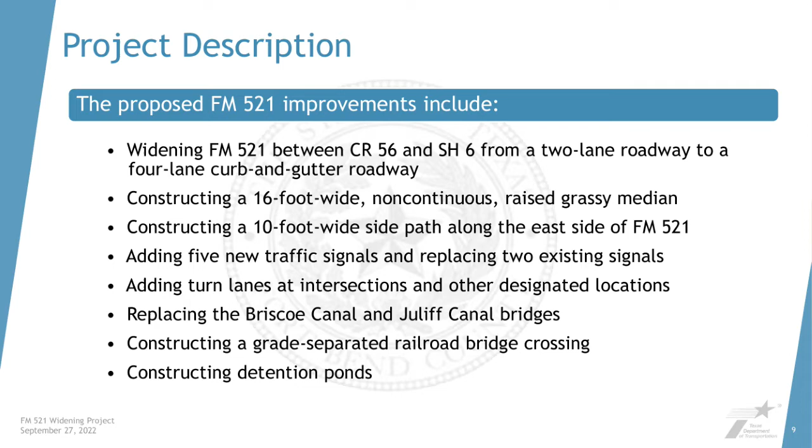The project includes replacing the Briscoe Canal and Juliff Canal bridges and constructing a grade-separated bridge at the BNSF Railroad crossing. The project would also include the construction of new detention ponds. The project is needed because of limited mobility in the corridor, anticipated future population growth and increase in traffic, and the current two-lane undivided roadway does not meet design or safety standards.

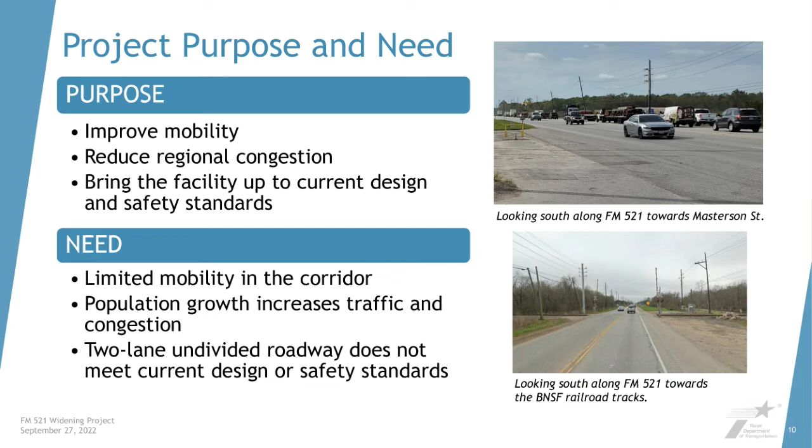The purpose of the FM 521 widening project is to improve mobility, reduce regional congestion, and bring the facility up to current design standards. Let's talk about daily traffic volumes along FM 521, what it is today, and what is projected for the future.

Average daily traffic, or ADT, represents the traffic volume that results from dividing a traffic count obtained during a given time period by the number of days in that time period, or the average traffic volume per day. Based on preliminary traffic data, the 2024 ADT along FM 521 within the project limits is 27,200 vehicles per day, or VPD.

By the year 2044, traffic volumes on FM 521 are projected to be 48,900 vehicles per day, which is an 80% increase from 2024.

With no improvements, the current capacity of FM 521 would not be adequate to accommodate projected traffic volumes in 2044, and traffic congestion would increase.

Fort Bend County initiated a feasibility study for FM 521 in March of 2019 due to the increased number of planned developments along the corridor.

The study included data collection and stakeholder coordination to help determine what improvements were needed within the project limits. The feasibility study concluded that the corridor is rapidly developing and the need for additional capacity is becoming critical.

The project team has evaluated environmental constraints and analyzed potential environmental impacts. Constraints such as water bodies, potential wetlands, floodplains, gas stations, and railroads are shown on the environmental constraints map included with the public meeting materials.

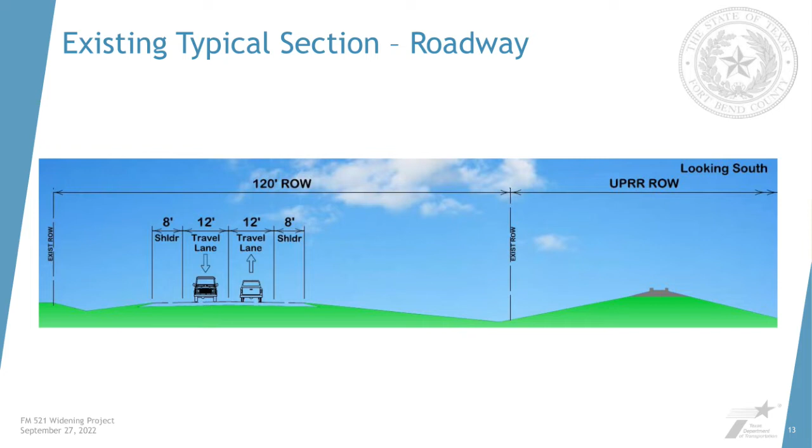The remainder of the existing FM 521 roadway includes one 12-foot wide travel lane in each direction and 8-foot wide outside shoulders. The typical existing right-of-way width is approximately 120 feet.

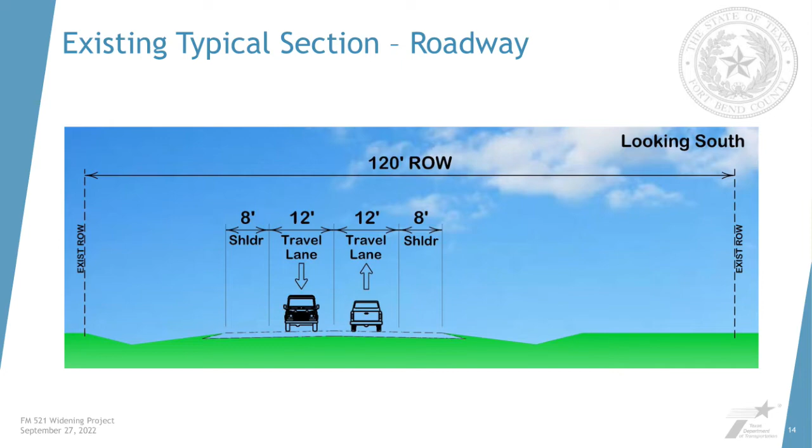The proposed project would include two new canal bridges. These typical sections would have two 12-foot wide travel lanes in each direction, a 16-foot wide continuous raised concrete median, and a 14-foot wide side path separated from traffic by a concrete traffic rail.

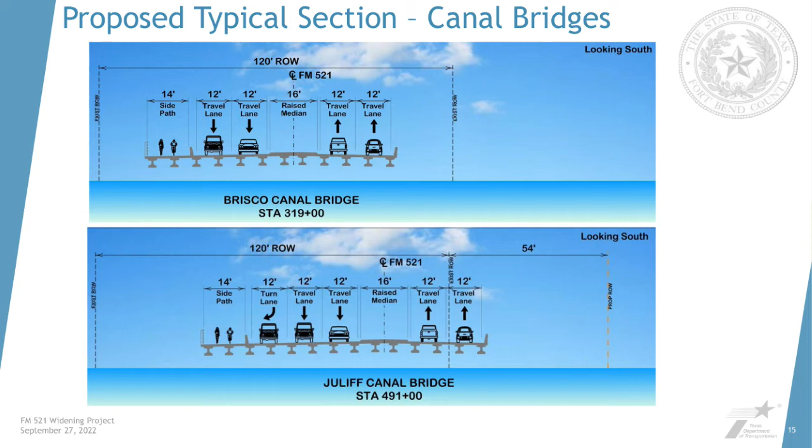The Briscoe Canal Bridge would not require additional right-of-way. The Juliff Canal Bridge would require an additional 54 feet of right-of-way, as shown in the proposed typical section. The proposed railroad bridge typical section will be discussed a few slides later.

Left and right turn lanes would be provided at designated locations. Please refer to the schematic, which is included in the public meeting materials, for specific locations.

For the remainder of the project length, the typical section generally includes two 12-foot wide travel lanes in each direction, a 16-foot wide non-continuous raised grassy median, and a 10-foot wide side path to accommodate pedestrians and bicyclists. Left and right turn lanes would be provided at designated locations.

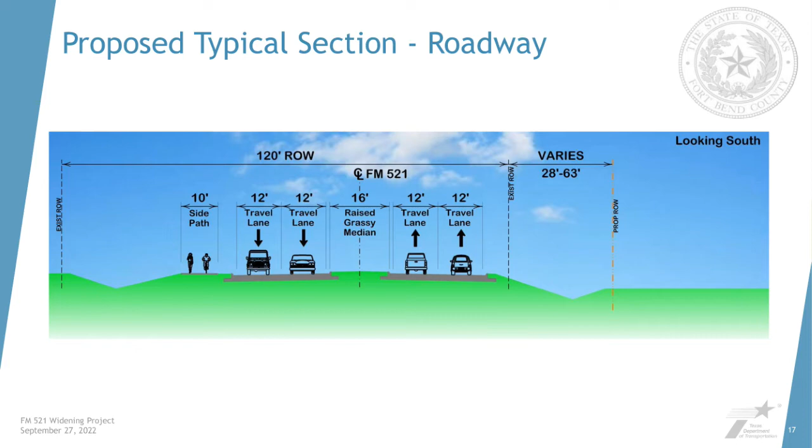The proposed roadway right-of-way width would range between 148 feet and 183 feet. This would require an additional 28 to 63 feet of proposed new right-of-way on the west side of FM 521.

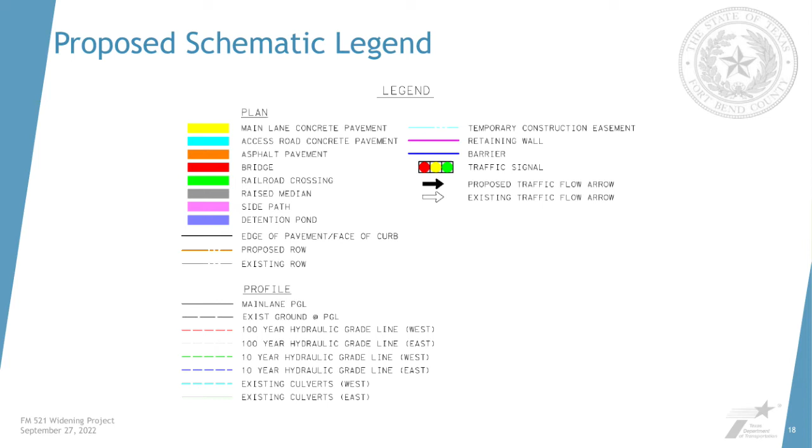Note that the black solid lines outline the proposed edge of pavement, thin black dashed lines show existing right-of-way, and orange dashed lines indicate the proposed right-of-way. Thick pink lines denote locations of proposed retaining walls. Lastly, the schematics also show proposed detention pond locations as solid blue features.

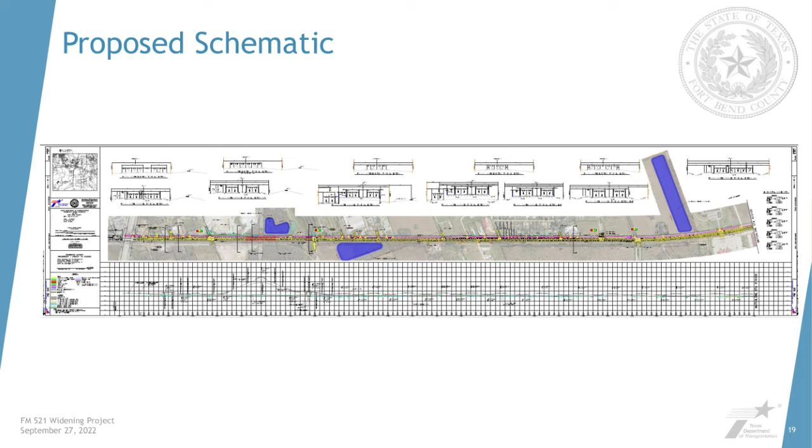The June 2021 public meeting presented 4 alternatives at the railroad crossing. The design of the preferred alternative includes a bridge or grade separation over the railroad tracks to increase safety and mobility. On average, trains currently cross the roadway 27 times a day, causing traffic delays, not only for commuting vehicles, but also for emergency response vehicles.

With the ongoing growth of population, schools, and businesses, the delays caused by train crossings would only increase. The preferred alternative includes a 4-lane divided roadway bridge that would replace the existing at-grade roadway.

The bridge would cross the existing railroad with 2 12-foot wide travel lanes in each direction and a 16-foot wide raised concrete median. The design includes a side path that would be located on the bridge structure, and it would be separated from the traffic lanes by a concrete traffic rail.

In order to maintain access to the businesses and property owners on the east side, a proposed at-grade access road parallel to FM 521 is shown in turquoise blue. The access road would terminate with a cul-de-sac under the bridge.

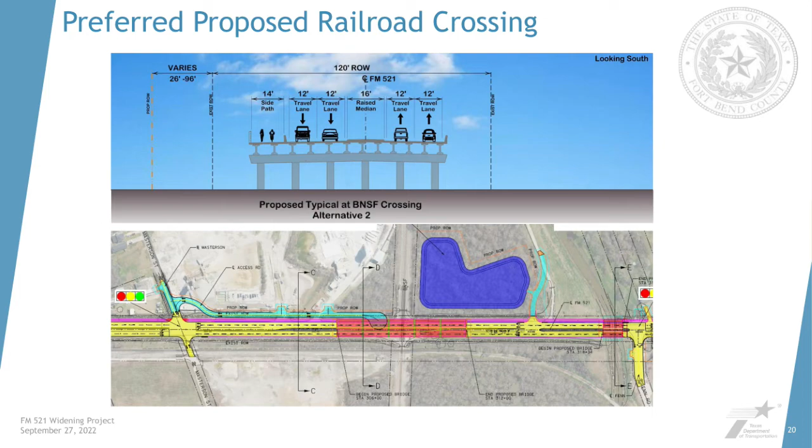The City of Arcola wastewater treatment plant driveway, shown to the right of the detention pond, would also be realigned as part of this preferred alternative.

The proposed FM 521 project would include 6 new detention ponds. A drainage study was completed to determine the number, size, and locations of the detention ponds to be used for increased roadway runoff.

Proposed detention ponds shown on the map include 2 ponds located on either side of the roadway near the Briscoe Canal, 1 pond located south of Scanlon Road on the east side of FM 521, 1 pond located north of Southern Colony Avenue on the east side of FM 521, 1 pond located north of Miller Road on the west side of FM 521, 1 pond located north of County Road 56 on the west side of FM 521. Approximately 43 acres are needed for the proposed detention ponds.

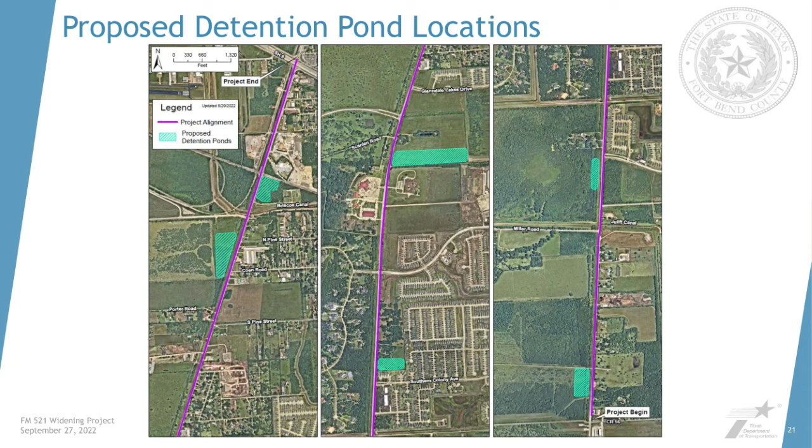A warrant study is required to determine locations for new traffic signals. The warrant study completed for this project proposes adding 5 new traffic signals within the project limits. Proposed locations for these signals are Masterson Street, Glendale Lakes Drive, Sienna Point Caldwell Ranch, Southern Colony Road, and Juliff-Manvel Road. The existing signals at Fenn Road and Sienna Parkway would be replaced.

Turn lanes would be constructed at each signalized intersection.

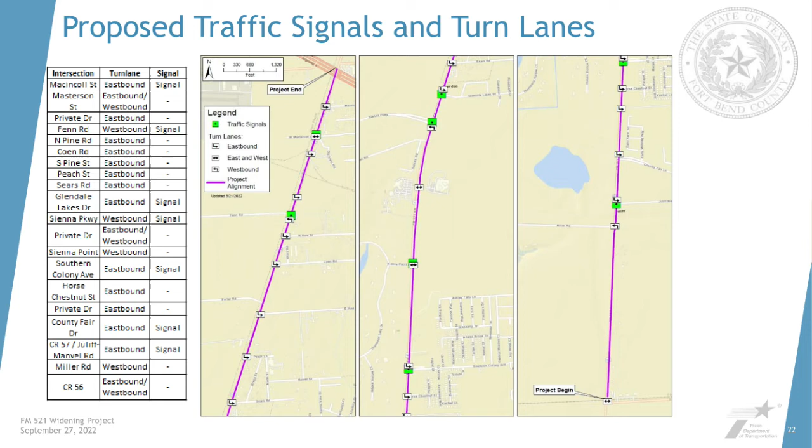The project team has identified and evaluated potential environmental impacts that could occur as a result of constructing the proposed improvements. Resources under review include community impacts, environmental justice, water resources, historic resources, archaeological resources, hazardous materials, biological resources, and air quality. The project would be designed to avoid or minimize impacts to the greatest extent practicable. Once completed, technical reports documenting the analysis and conclusions of these studies will be available for review upon request.

Existing and predicted traffic noise levels were modeled using the approved Federal Highway Administration, or FHWA, traffic noise modeling software to determine if any of the modeled receivers could have noise impacts above the FHWA's actionable levels. Based on the modeling conducted, predicted noise levels at 9 of the 17 modeled receivers were identified as impacted, including 7 residences and outdoor gathering areas at 2 churches.

Noise abatement measures were considered for each location with predicted actionable noise impacts. As per policy, the following noise abatement measures were considered: traffic management, alteration of horizontal and/or vertical alignments, acquisition of undeveloped property to act as a buffer zone, and the construction of noise barriers.

Potential construction of and modeling of noise barriers was the only noise abatement measure found to be practicable for this project. In order to include noise barriers for a proposed project, noise modeling needs to show, per federal regulations, that noise barriers meet both noise reduction and cost criteria. The draft traffic noise technical report concluded that noise barriers would not meet both the noise reduction and cost criteria and are not recommended to be included in the project.

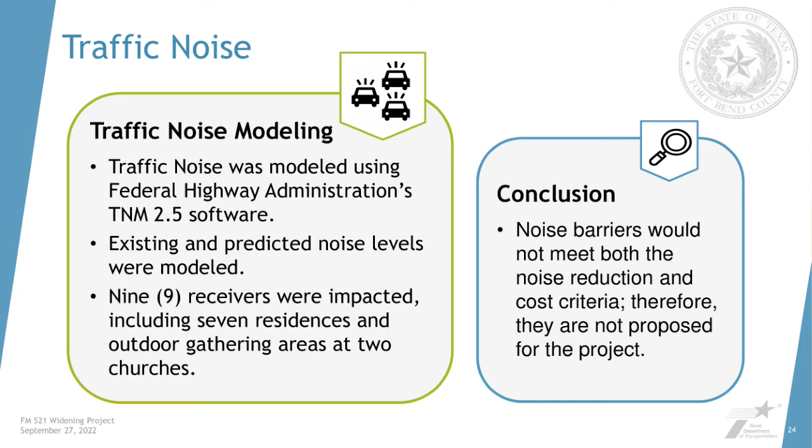A total of approximately 65 acres of additional right-of-way would be required for the proposed project. No residential displacements are anticipated. One potential displacement of a commercial structure associated with Campbell Concrete and Materials has been identified.

Fort Bend County offers relocation counseling and financial assistance to residences and businesses that are displaced by the acquisition of highway right-of-way in accordance with the Uniform Relocation Assistance and Real Property Acquisition Policies Act of 1970.

Please feel free to contact Mr. Guy Matula, Special Projects Coordinator, Right-of-Way, Fort Bend County Engineering, at 281-633-7529 or by email at fbcproject-fm521south@binkleybarfield.com with any right-of-way acquisition questions.

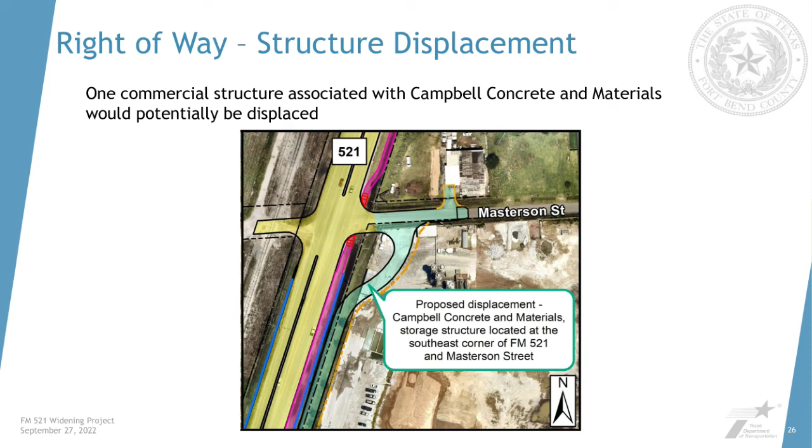This slide shows the location of the commercial structure potentially impacted by the new right-of-way for the proposed FM521 widening. The structure appears to be used for storage and is associated with Campbell Concrete and Materials, located at the southeast corner of FM 521 and Masterson Street.

The Houston-Galveston Area Council's Regional Transportation Plan, or RTP, identifies the region's transportation needs, goals, and policies over the next 25 years. It sets the framework for a balanced and forward-thinking system with major investment strategies supporting traditional modes, such as roadway improvements, and alternative modes, such as mass transit, bicycle, and pedestrian facilities. With the assistance of transportation planners, engineers, elected officials, and the public, the RTP helps identify transportation facilities and services needed to support the region's anticipated growth using available resources.

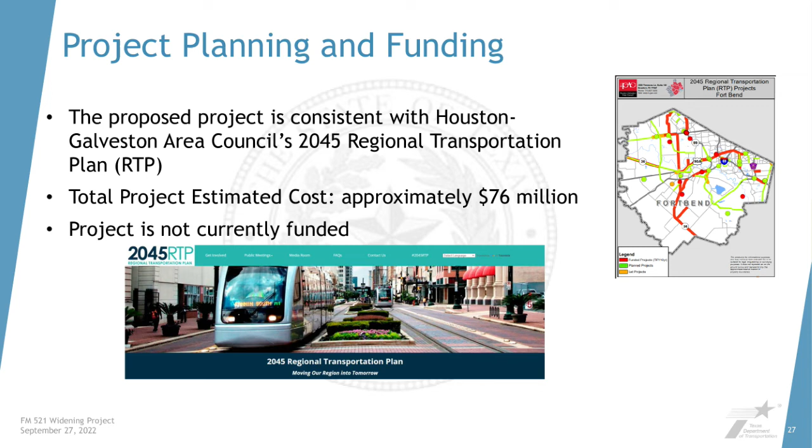The proposed project is anticipated to cost approximately $76 million, but is currently not funded. The project is programmed to begin construction in 2028, however, could be moved forward if funding is identified.

The next steps include refining the schematic and completing environmental studies. Provided the environmental documents and process are approved, the project would then move into detailed design, and right-of-way acquisition could begin once funding is identified. Construction is anticipated to begin in the fall of 2028 if funding is secured. The project team anticipates that construction would take approximately 2 years.

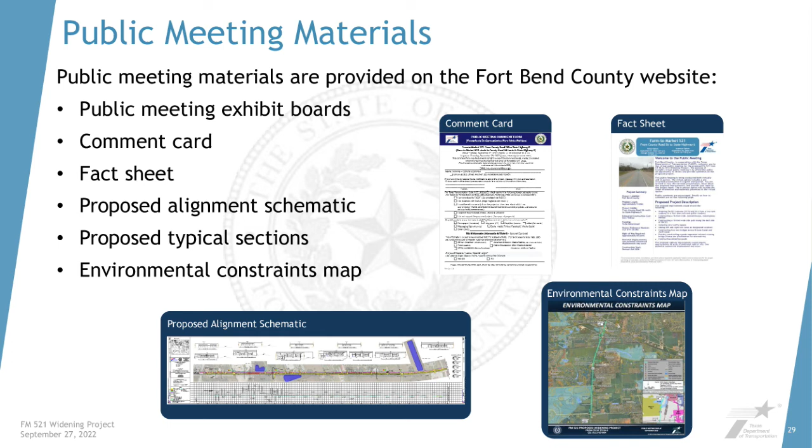The project website contains all materials presented in this public meeting, including this presentation in both English and Spanish, exhibit boards, a comment card, a project fact sheet, schematic layout for the proposed alignment, proposed typical sections, and the environmental constraints map. The schematic layout provides a more in-depth look at details such as existing and proposed right-of-way, side path, bridges, medians, and turn lanes. These files are large and may require more time to download than other project materials.

Fort Bend County and TxDOT encourage you to review the materials posted on the public meeting website and to provide written comments. The comment form is located on the website. Comments must be received by email or mailed and postmarked by Friday, October 14, 2022, to be included in the official public meeting summary report.

You may submit written comments in the following ways: at the in-person meeting, fill out the comment card and drop it in the comment box; by email to fbcproject-fm521south@binkleybarfield.com; or by mail to Kevin Minio, Project Manager, Binkley and Barfield, 1710 Seamist Drive, Houston, Texas 77008. Again, responses to comments received during the comment period will be included in the public meeting summary report that will be posted on the project website approximately 3 months after the end of the comment period.

The project website is www.fortbendcountytx.gov, keyword search FM521. Don't hesitate to contact us with any questions.

Please feel free to contact the design consultant, Mr. Kevin Minio, Project Manager, Binkley and Barfield, Inc., at 713-869-3433 or by email at fbcproject-fm521south@binkleybarfield.com with any questions or comments.